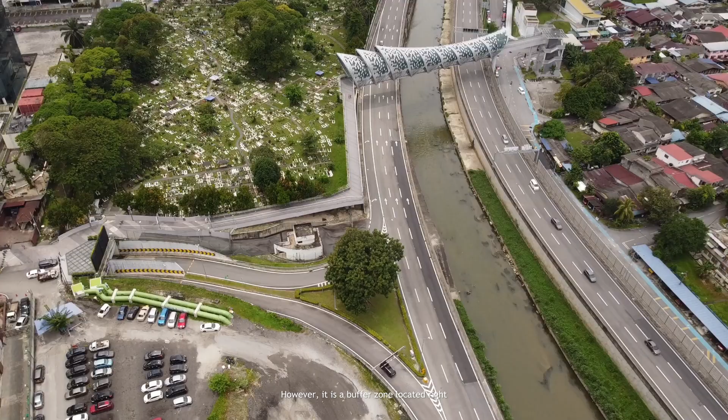However, it is a buffer zone located right between Kampong Bharu and KL City Centre. We can see significant contrast between lifestyles and architecture across the river - kids playing while people rush for work, traditional Malay houses on one side and modern high-rise buildings on the other.

The traditions of Malay culture have slowly faded away from Kampong Bharu towards the city centre. On behalf of Pusaka, the traditions of art and performances are hardly to be seen and are obscured by modern arts performance in the current situation.

Therefore, we came out with the solution of proposing a traditional art performance training centre that will allow the traditions of Malay performance to continue towards the community and future generations.

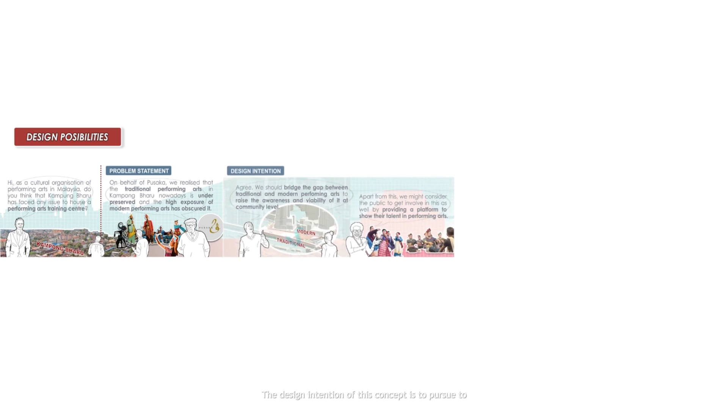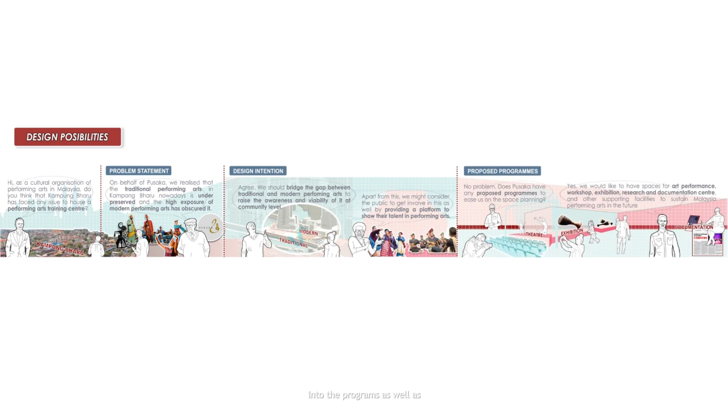The design intention of this concept is to bridge the gap between traditional and modern art performances and raise awareness towards the community. The public will also get involved in the programs, as well as have a platform to show their talents.

We categorize our target users into several categories to allow us to study their needs and routine: children and teenagers who want to explore their interests, local community and performers who want to continue their culture and introduce it to tourists, and lastly office workers who want to reduce their stress after work.

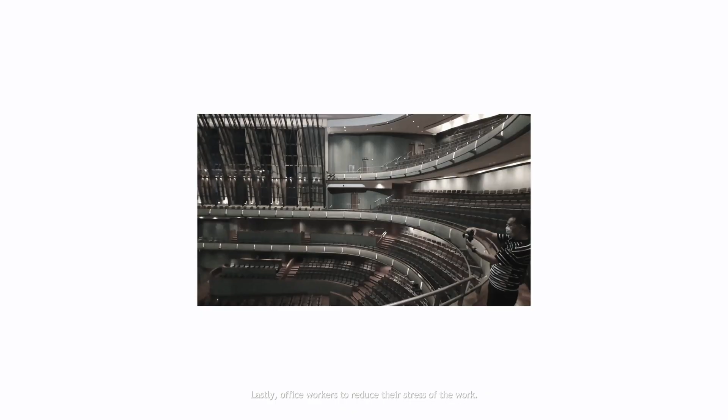The art performing theatre brings exposure towards traditional performances by providing a platform for them. Besides that, we also propose spaces to exhibit their traditional performances, costumes, and musical instruments.

To achieve the design concept, we propose a training workshop that provides a space for visitors to develop their talents and pursue them towards the future.

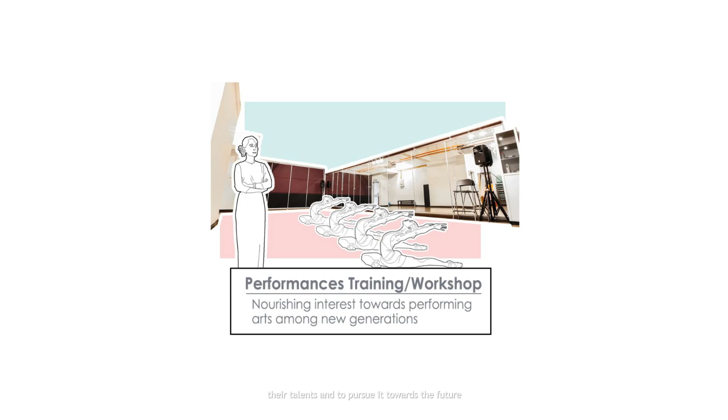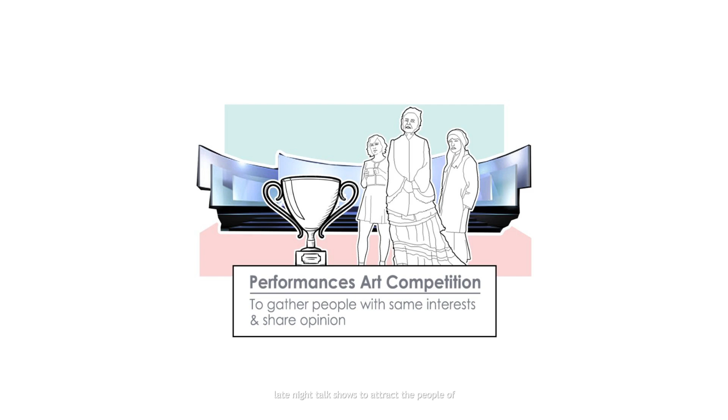In addition, we also propose live show performances with the intent of integrating the relationship between the performers and audiences. Lastly, an art performing competition and hosted late-night talk shows to attract people of the same interest towards the same space to innovate creative ideas within one another.

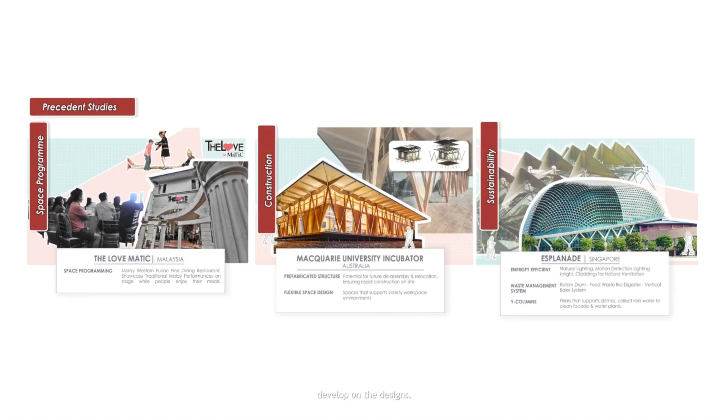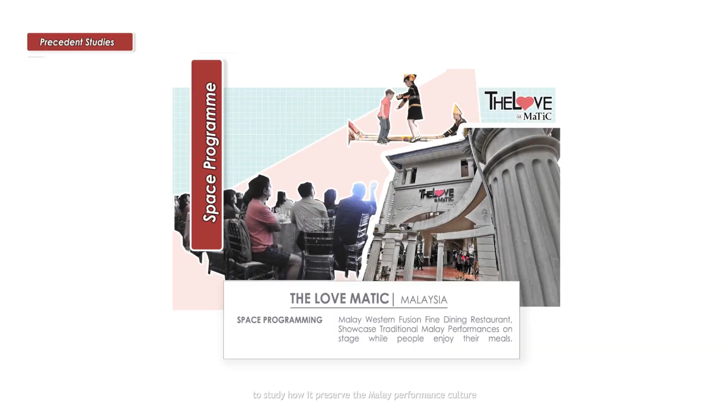We took 3 precedent studies in different aspects to help us develop our designs. We took Esplanade from Singapore to study their outstanding sustainability design developed into the building to keep it energy efficient. Furthermore, we took The Love Matic from Kuala Lumpur to study how it preserved the Malay performance culture through space programming. We also took Macquarie University Incubator from Australia for its flexible and creative construction design.

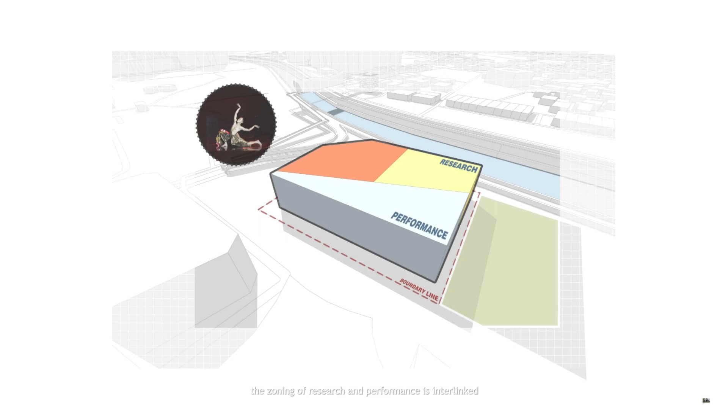The training center will be a space interconnecting the research of performance arts and providing a stage for the resulting performance. Hence, the zoning of research and performance is interlinked and assisted by the service and management.

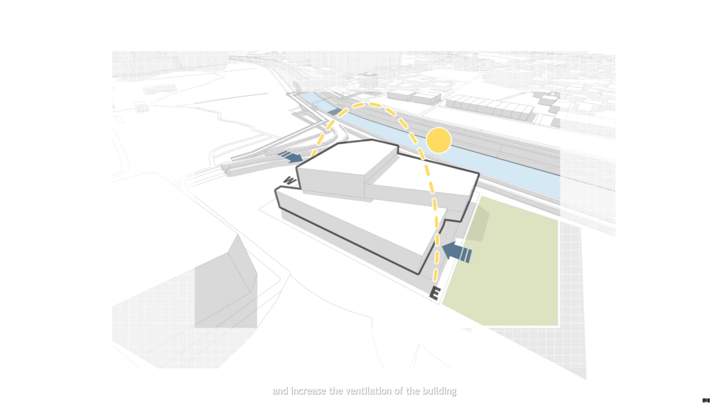The form is transformed to adapt to the weather condition of the site and increase the ventilation of the building. A plaza space is also included to maximize interaction, and the entrance is located beside the plaza to increase the intimacy of the building.

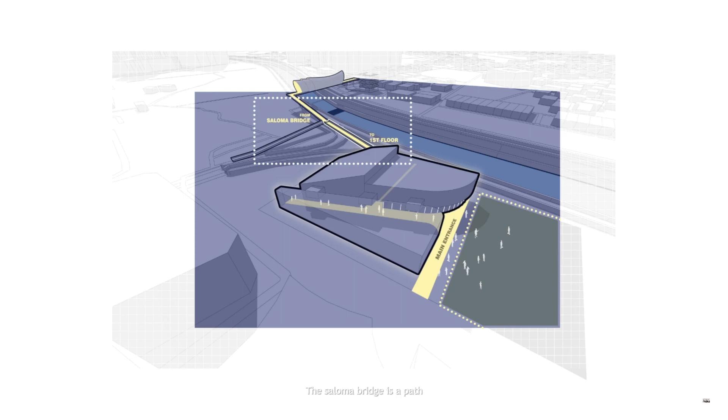The Saloma Bridge is a path connecting KL City and Kampong Bharu. It provides a great opportunity to link the bridge directly to our building.

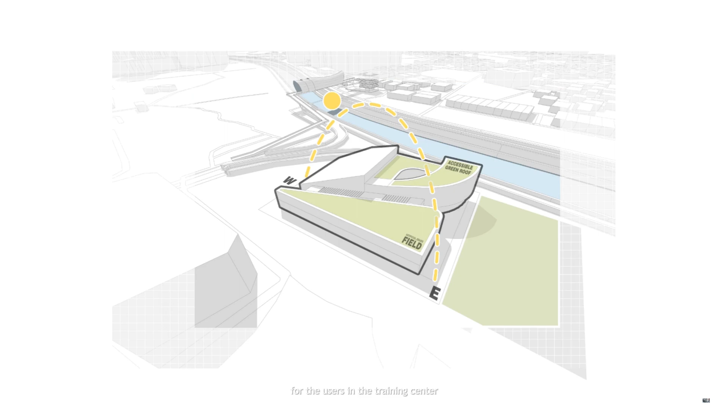Landscape design will include an artificial field for users in the training center to have outdoor activity. Sustainable designs such as solar panels will also be located at the service block, which are able to avoid shadow from the surrounding office towers.

Entrance to the proposed project road uses a 45-degree angle. The driver can proceed to the drop-off point, which acts as a connection with the plaza, once passing by the bus car park before entering the site.

After dropping off, the driver can choose to leave the site by turning right, or proceed to the basement car park by turning left to the ramp.

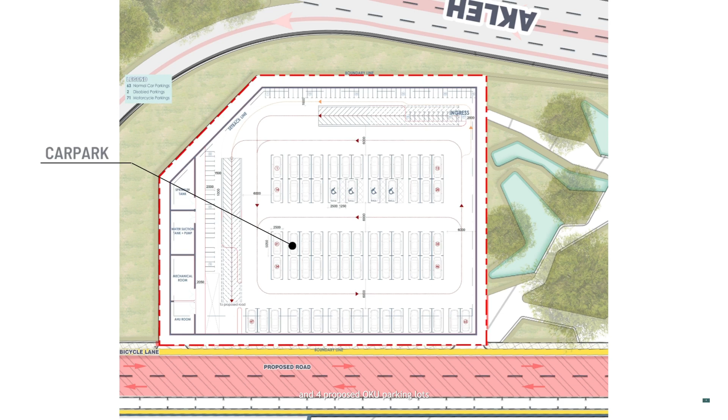After entering the basement car park, there will be approximately 63 normal car parking spots and 4 proposed OKU parking lots. The driveway will be 6 meters in width, moving in an anti-clockwise direction to the exit ramp.

After exiting the basement car park, the driver can choose to leave the site or proceed to the pickup point. Finally, the services are located at the same location of the building for the ground floor and basement level.

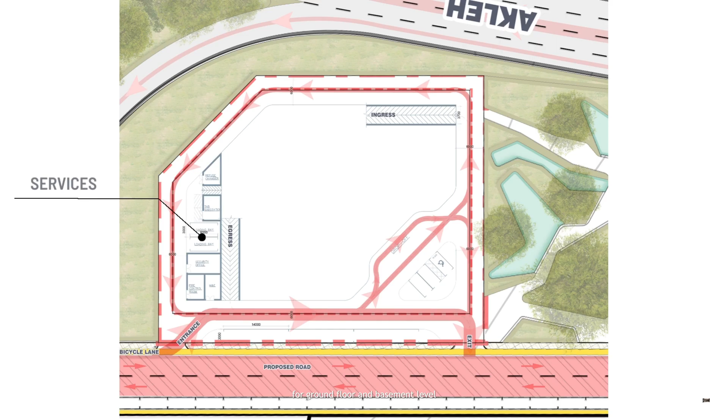We also propose a bicycle lane and covered pedestrian walkway with smart street lighting to improve the pedestrian walking experience, possibly leading to circulation from Saloma Bridge towards our site.

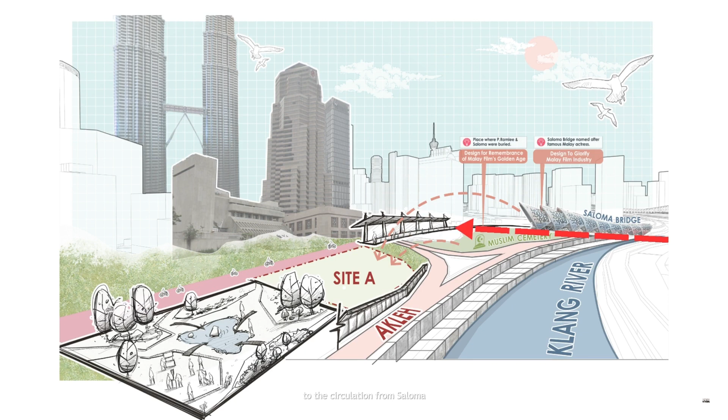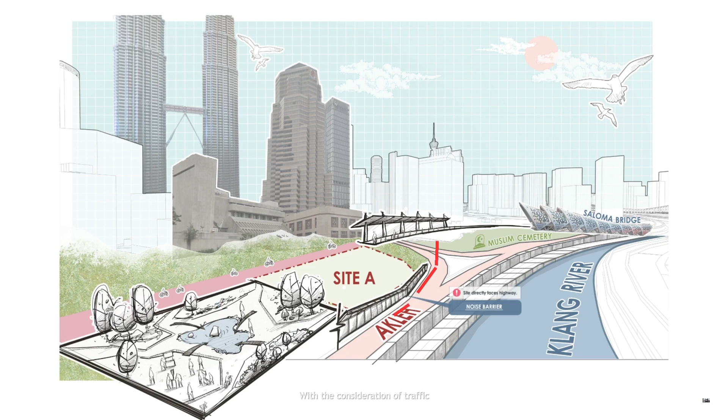A detention pond and public plaza are proposed to increase biodiversity around our site and provide a green space for the users. Considering traffic sound reaching our site, we also designed a sound barrier along the highway to ease the sound issue.